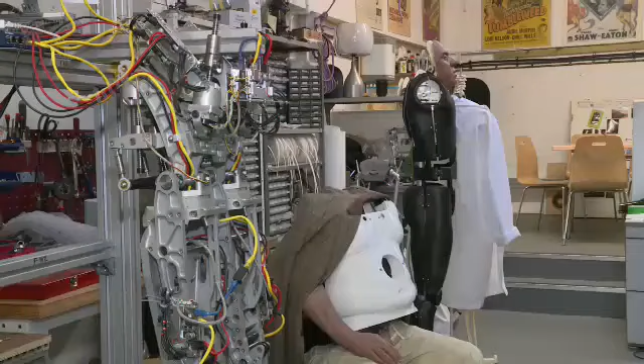Building robots is not just about mechanics, it's not just about making pieces of metal. It's about software, engineering, mechanical engineering, and really about integration - putting all of those things together to make a working system, a working machine.

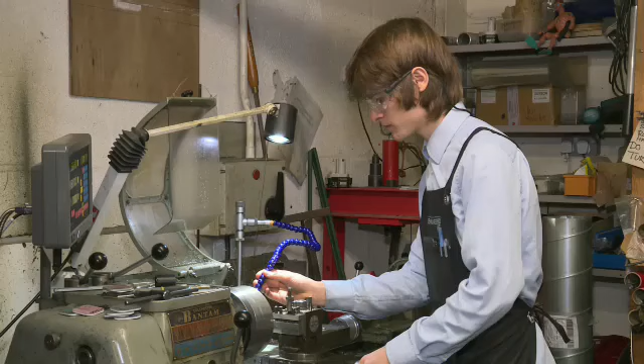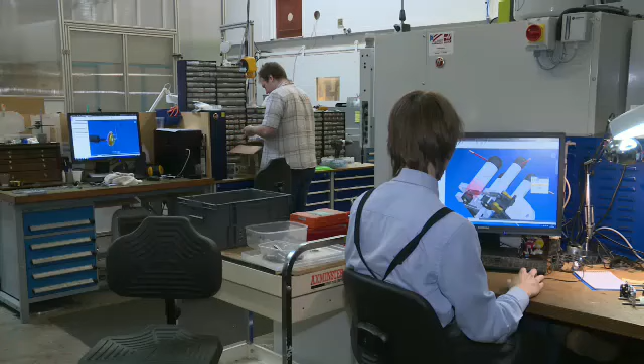There are currently 18 members of the Engineered Arts team. They come from a variety of backgrounds - it's very multidisciplinary. Everybody from creative people working on the design or content, the things the robot would say and do, how it would look, through to mechanical engineers designing how it would move, electronic engineers designing the transistors, the chips, the components and the circuit boards they go on to. So there's many different aspects to building a robot like this.

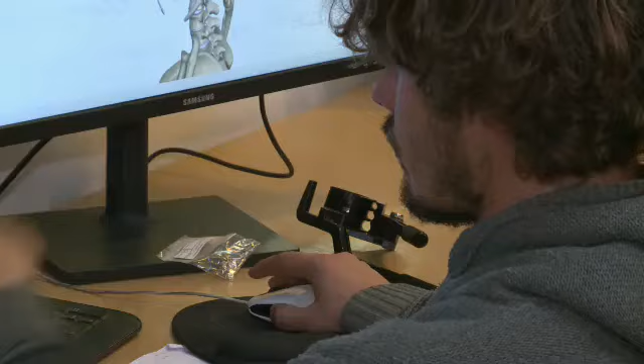In the offices upstairs, the designers and engineers use computer-aided design systems to develop new and improved versions of the robots. Downstairs, every model is assembled by hand in the factory workshop.

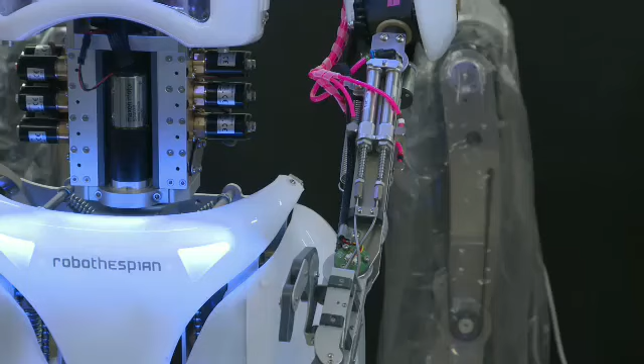But you're never going to find any of the robots they are building here working in a factory. When they are finished, these robots won't be replacing workers on an assembly line. They'll be in the spotlight, on a stage, in front of an audience.

When a man's an empty kettle, he should be on his mettle.

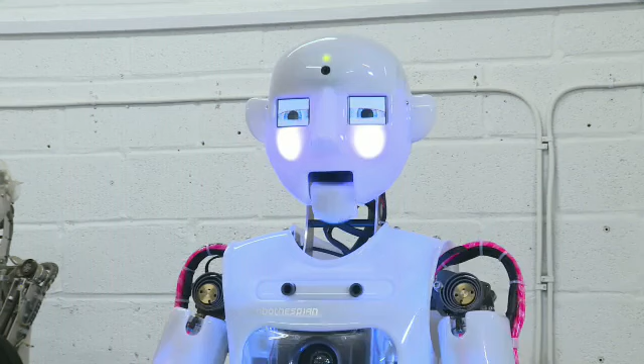Robothespian is about automating acting. This goes back about 12 years - we were asked to do some science explanation for a science museum, and we thought the best way to do it was just get a person to talk about it. But a person doesn't want to repeat the same story all day, every day. So we thought maybe we could automate this kind of storytelling and come up with a robotic actor to take the tedious role away from a human. Rather than having to repeat the same story to every person that comes along, the robot could do it for you. So that was the birth of the idea for Robothespian.

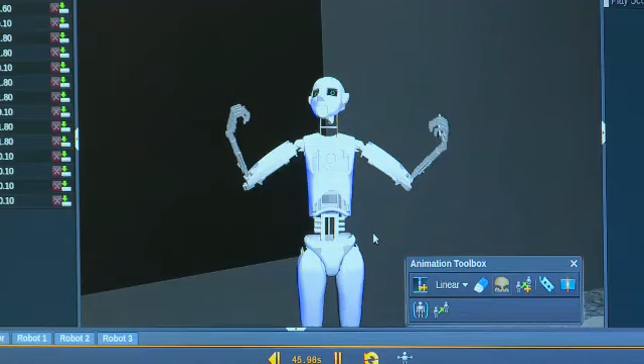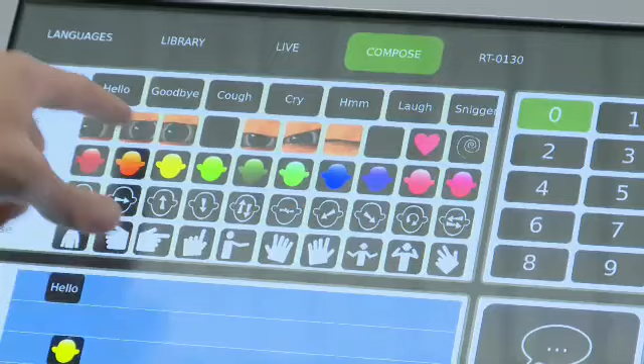Robothespian can be pre-programmed with 3D animation software. The user can choose in advance what the robot is going to say, what actions it's going to use, and even when its cheeks are going to change colour during a performance.

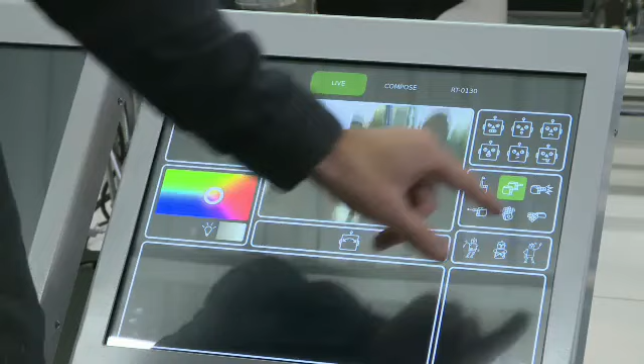Robothespian can also be controlled remotely. The robot has cameras, so the operator, who can be anywhere, is able to see through the robot's eyes. The operator can then directly interact with an audience, speaking through the robot.

Giving the illusion that the robot is alive and thinking, that the robot is sentient.

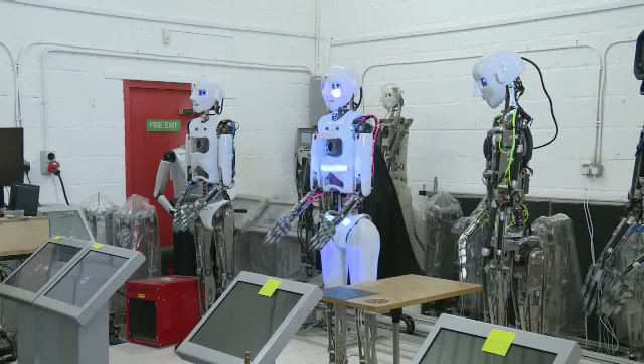The robot's software has face recognition technology, so its camera eyes are always scanning for faces, making eye contact with its audience. The movement of its head, the way it engages with the audience, and even how it blinks all add to the illusion that the robot is human. All of these characteristics are vital to its purpose.

The only reason to make a human-shaped robot is to talk to you, because that's what you're used to. You're used to something that makes eye contact with you, that smiles at you, that might wave to you. These are the ways we communicate as people, and if I want to make a machine to communicate with people, I need to emulate those human characteristics.

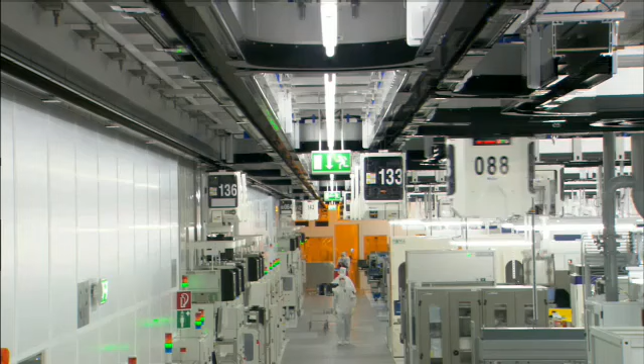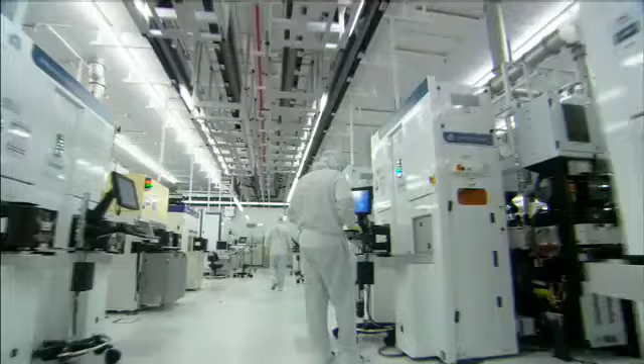A robot who can sing and quote Shakespeare is an engaging and entertaining example of robotics in action. While it's very unlikely that many human actors will lose roles to Robothespian, or that you'll see it on screen in the latest blockbuster film anytime soon, this charming robot still represents some very real concerns about the ever-increasing levels of workplace automation in our society today - the fear that one day we will all be replaced by a robot.

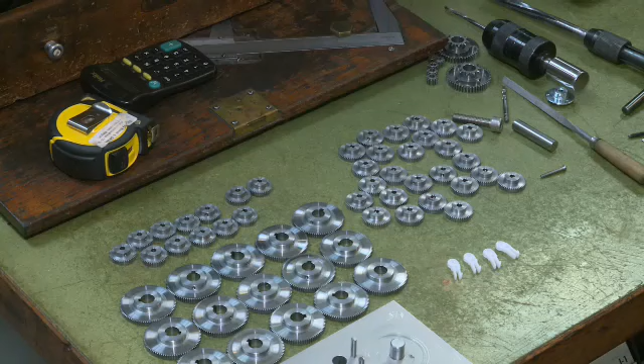Every Robothespian is made up of more than 2,000 individual components, from the tiniest plastic fingertip to hundreds of individual steel cogs. In the past, it would have required the work of many highly skilled craftspeople to make all these items.

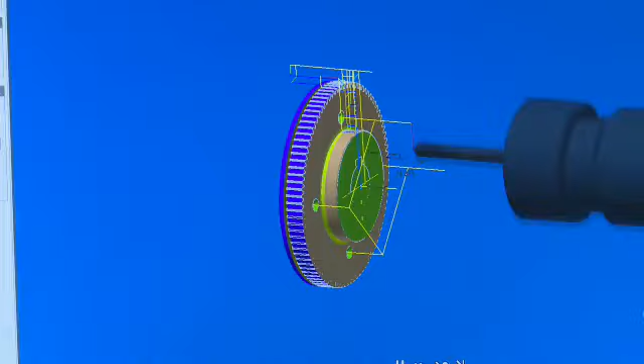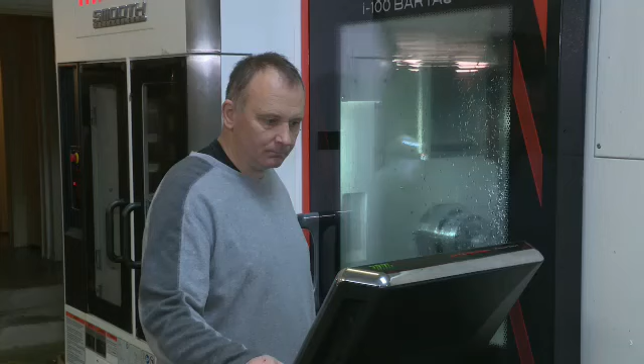Today, most of the work of producing these components is automated. Guided by computer-aided designs, a single programmable machine creates the most complex and tiny components with perfect accuracy every time. All it takes is one machine and one person.

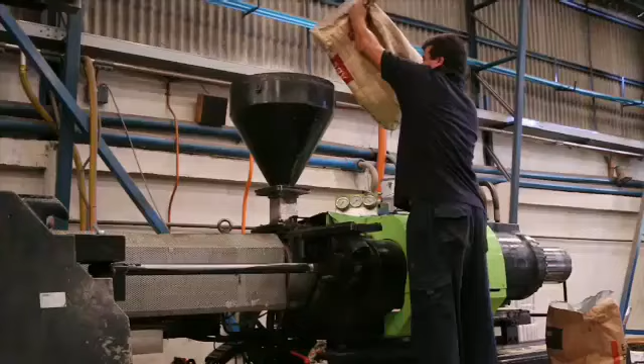Some experts have predicted that in the future, any job that can be automated will be automated. They've suggested that by the year 2030, as many as 800 million workers around the world will be replaced by robots.

From self-driving cars to vacuum cleaners, we are starting to see more robots in our everyday lives. Does Will think there'll be a fully functioning robot in every home in the near future? Personally, I don't think so. Personally, I wouldn't actually want one.

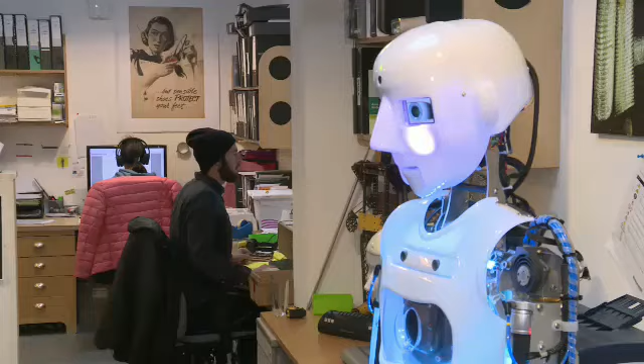The things we're looking at is I think you will start to see robots in many more commercial spaces. So if you go shopping, you might notice a robot at the door of a shop, and it might just tell you that we've got this lovely new suit in store today that might suit you.

It might just be an advertising robot, or it might just be purely for entertainment. You might walk down the street and there's a robot singing and dancing and doing a little song that you think is rather charming, and entertainment has value.

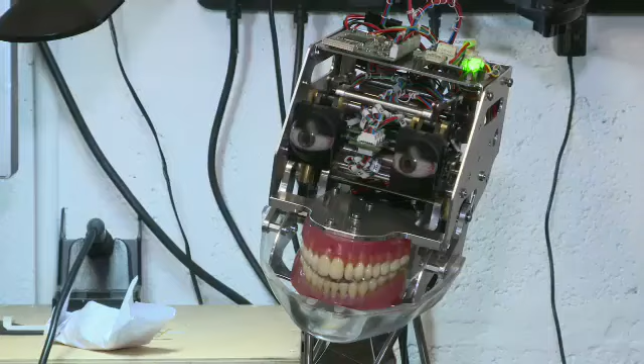Engineered Arts have a new model called the Mesmer that looks less like a machine and more like a human. Its robotic skull is covered by a silicone skin, and it has realistic eyes and teeth. Maybe one day in the distant future, you won't be able to tell the difference between a robot actor and a real human. But Will and the team aren't thinking that far ahead yet.

In the short term, things are actually quite good for us. We have a lot of interest in the kind of machines that we're making. People find them entertaining, people find them engaging. So people are using them for sales, they're using them for communication. We also sell to universities who are studying robots and want a platform to develop on. It's quite difficult to make a robot from scratch.

So we are moving to a newer, bigger factory 2 miles down the road at some point next year. And we're investigating commercial applications, entertainment applications. But it's really about engaging with people. It's about telling a story, and primarily it's about having fun. It's about improving human existence, not worsening it.

I'm singing in the rain, just singing in the rain. How was that?